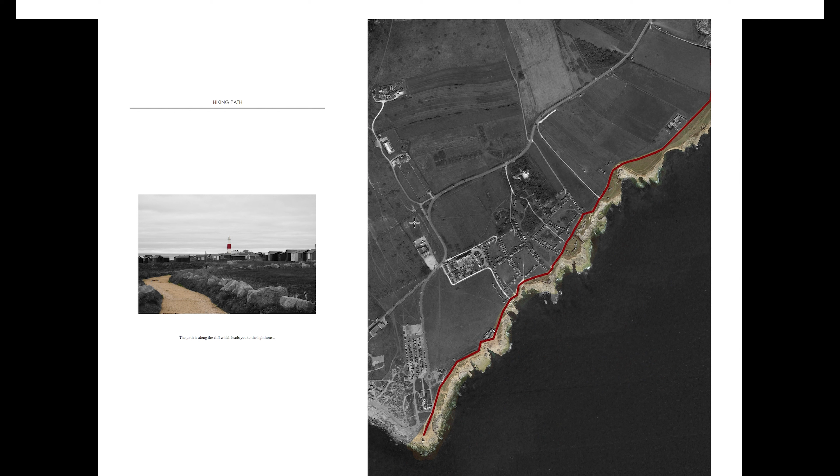My sites are located on the coastal hiking path around Portland Bill, which is the southernmost point of Portland. The path is along the cliff which leads you to the lighthouse. During my first site visit, I found out that the Bill is a nice tourist attraction spot, with a series of landmarks around it.

Through investigation of the geological incidents that happened along the coast of Portland Bill, I found out that Portland Bill is a great place for geological observations. Yet there are no other leisure facilities along the coastal path, and many people just drove to the Bill and missed the views along the cliff.

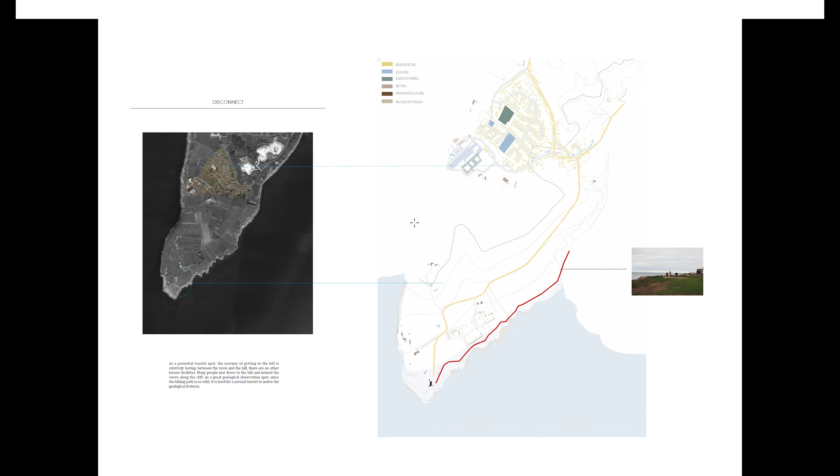Therefore, the project proposes a series of leisure facilities along the path to lead and attract people to walk through the path to the Bill.

The program from left to right will be a gallery, a restaurant, a toilet with an extraordinary experience, and a small hotel room. Each occupies a great spot for observing various geological features, including the cave and the collapsed coast.

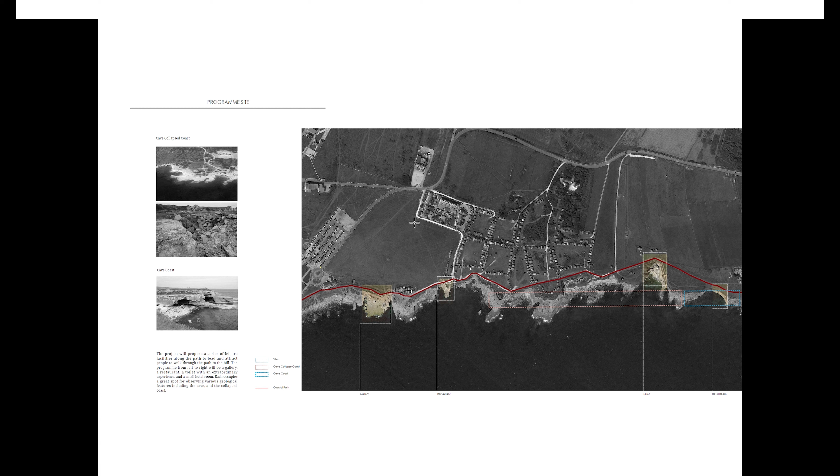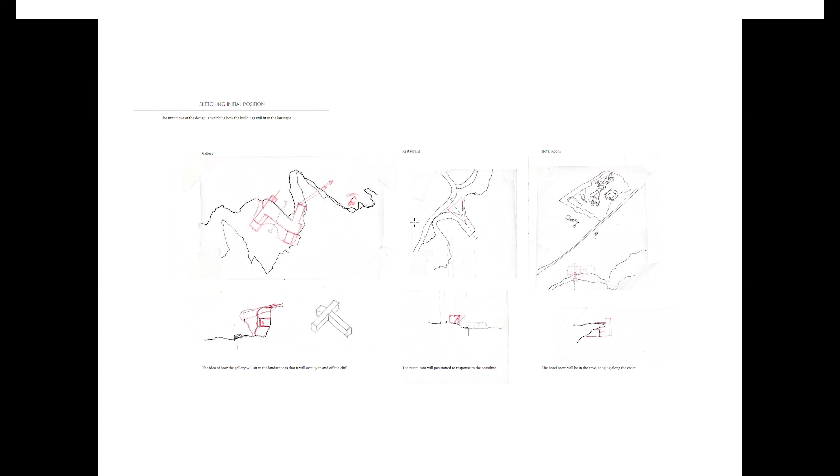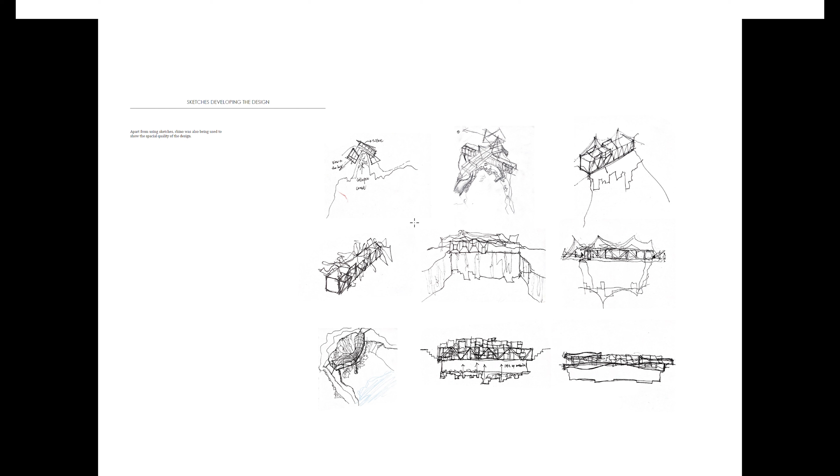I first chose the toilet to develop the design, since the program is much simpler to design. The tests include digital models in Rhino and traditional sketches. This is the first design and render of the toilet.

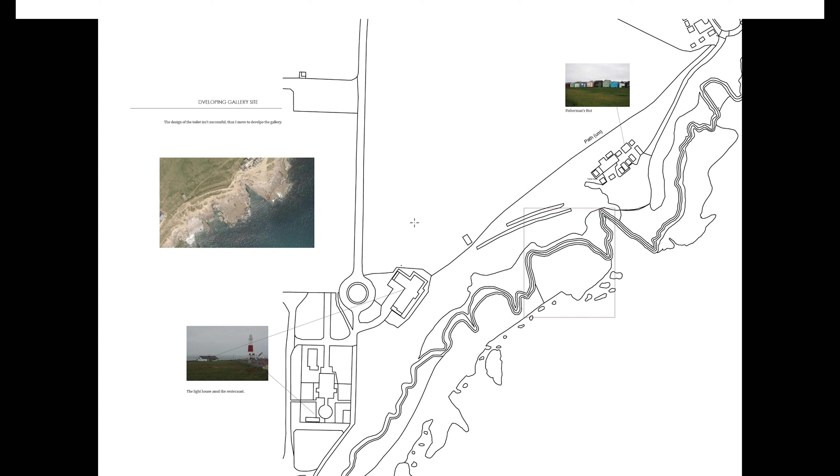The design concept is that the building will be a composite of fine-cut Portland stone and raw stones lifted from the coast. At this stage, I found out that the design I developed with the toilet wasn't successful, and designing it constrained my imagination. Thus, I moved to mainly design the gallery to develop further.

Before diving into the design and getting lost again, I reevaluated the design strategy of my Project 1, which is combining different scientific forms generated by Grasshopper, and I tried to bring this strategy back to my Project 2.

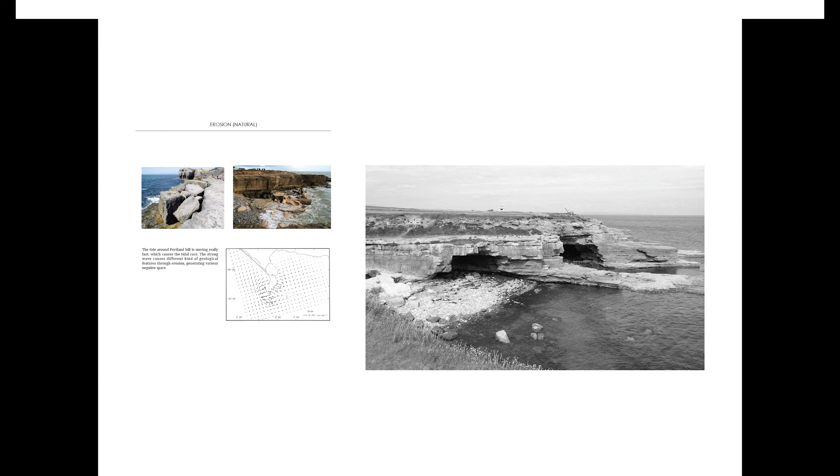There are two forces eroding and shaping the coast of Portland Bill. First is the wave - the strong wave causes different kinds of geological features through erosion, generating various negative spaces. Another force is quarrying. Therefore, I am thinking of how I can reverse the process of these two erosions to build out the space.

There are three major concepts that drive the design of the project. The first is using the architectural elements of the quarry, such as the lighting, the contoured landscape, and the path inside the quarry that takes you to explore the underground mystery.

The second design tool is the wave data of Portland. The data includes the cycle, the height, the location, and the direction of the waves. Lastly, I determined the percentage of artificial and natural erosion in each site, which would determine how much percentage of digital design I would use in each building.

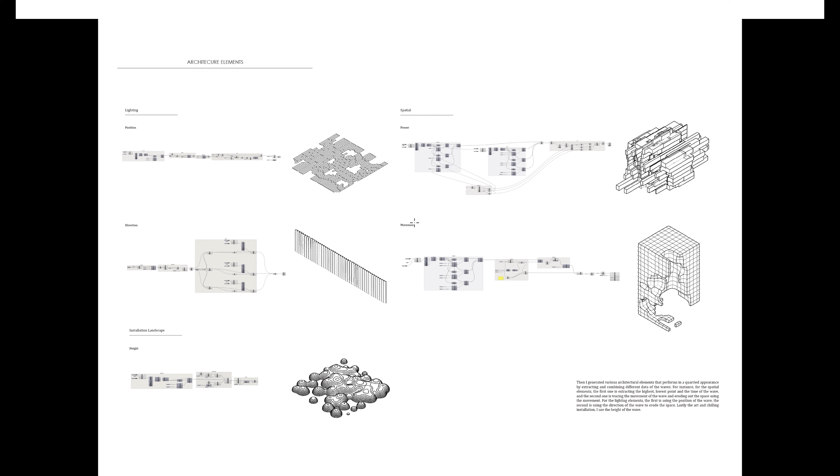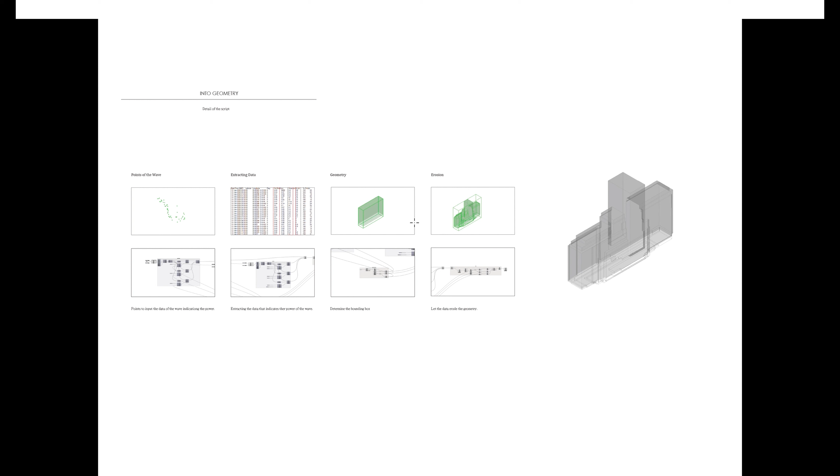Then I generated various architectural element sets, performing the quarried appearance by combining different data of the waves. For instance, for this spatial element, I first mapped out the position of the wave within a specific timeline, then extracted the data that indicates the power of the wave at the corresponding time. Finally, I improved the script so that the data could erode within the geometry that I determined.

So the form varies not only when I apply different data - the longer the time I apply it, the more the data will erode the space, and it also varies when I apply it to different geometry.

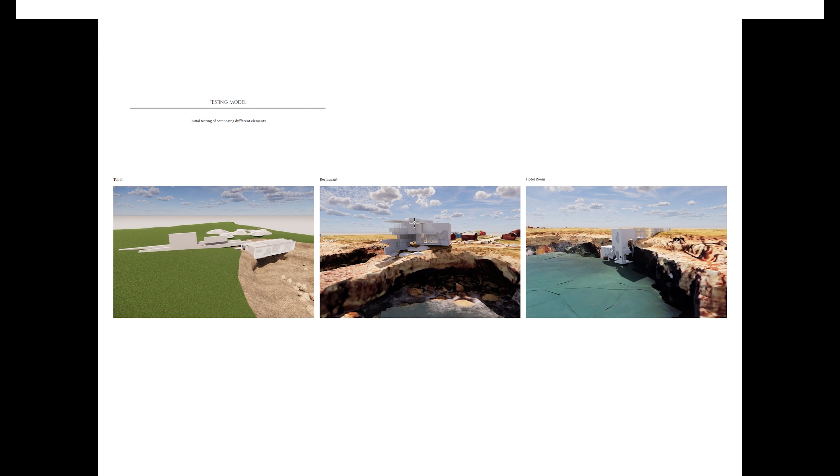With all the elements, I first designed conceptual models that combine the elements in Rhino, and for the plan of the building I worked in a more traditional way, sketching how the circulation of the gallery could experience like a quarry.

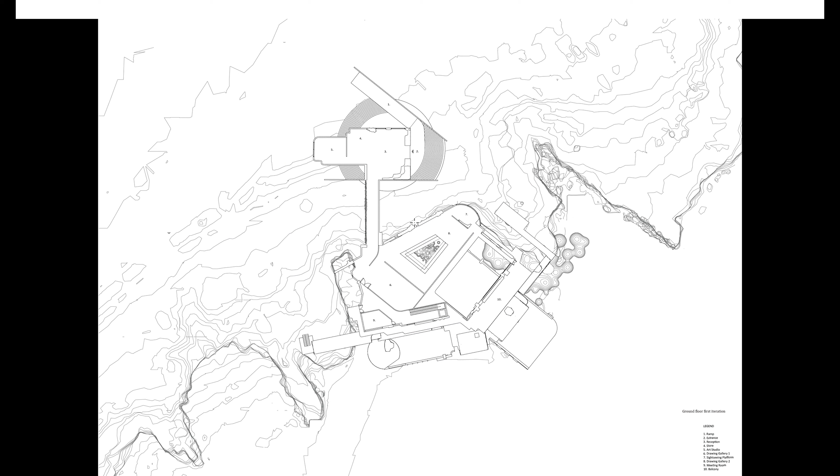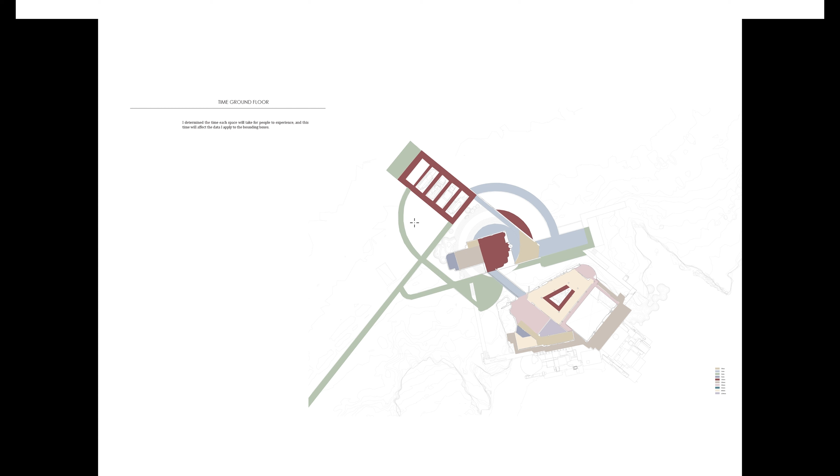With the plan done, the next process is to start applying data to erode the building. First, I determined the time each space will be spent by users. Then I built the model and created several bounding boxes waiting for the data to erode with different corresponding time periods according to the time I determined for the spaces.

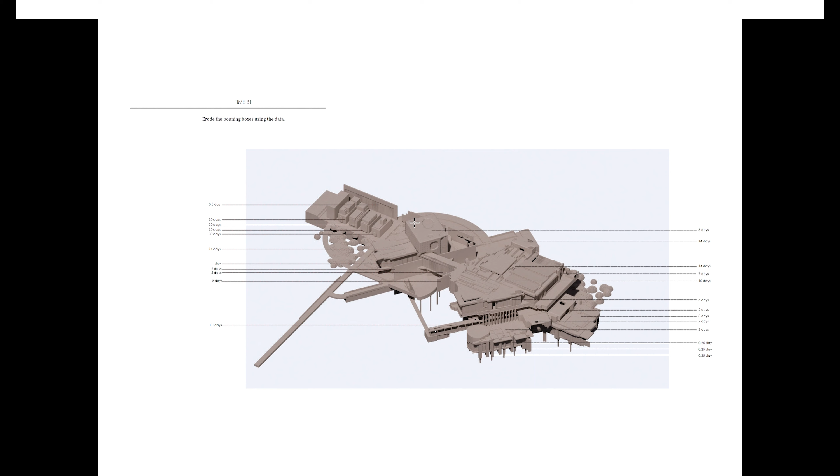50% of the bounding boxes were applied with the data to erode. The material of the data will mainly be Portland stone, and other time-affected materials such as wood and rusted metal will be used in less time-consuming spaces such as corridors. Other stone materials were selected to add variation to the spaces.

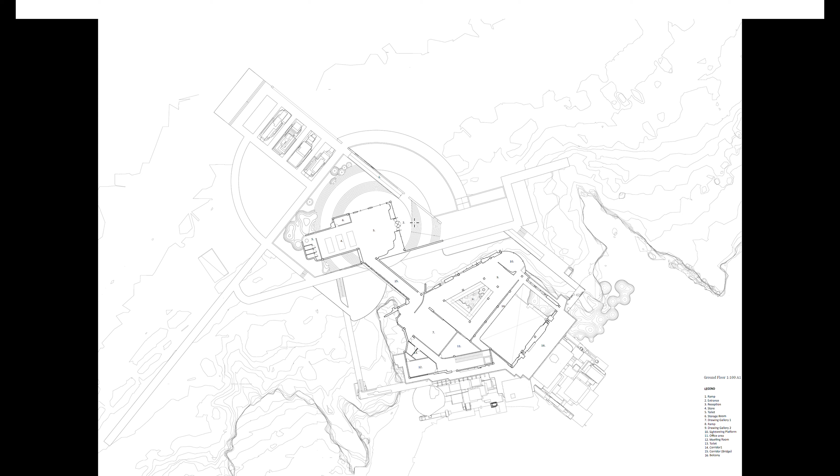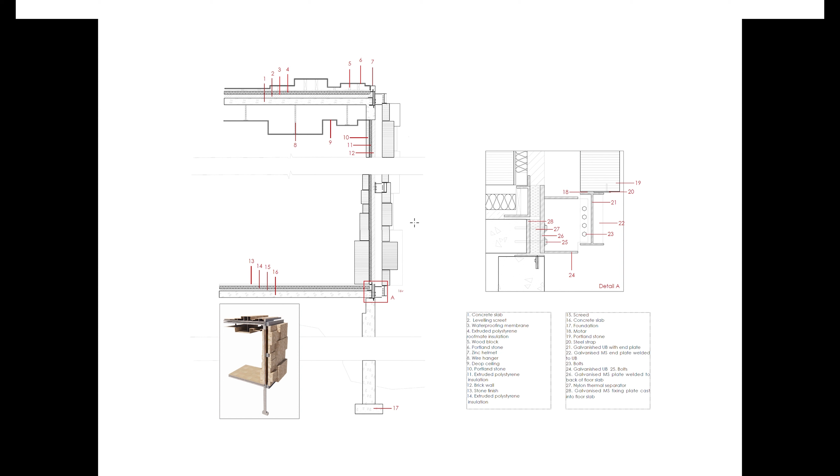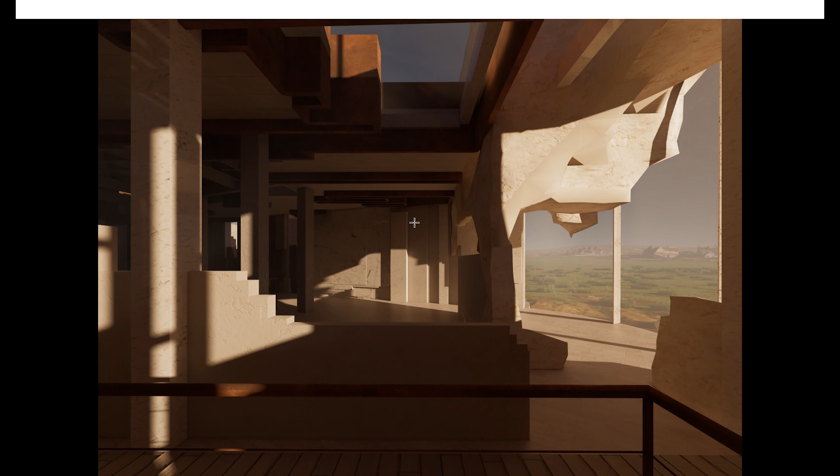And final renderings of the gallery. And now I will show you the final film of my project.

The eventual arrival of steam power and mechanization freed quarries of all constraints and enabled them to gorge inland, removing field after historic field, giving the landscape we see today.

Wight, Portland, Plymouth. Southwest 5 or 6, occasionally 7 until later. Rain, then showers, moderate or good.

The island of Portland provides one of the most dramatic coastlines in England. A block of limestone, tethered to the mainland only by the mighty Chesil Bank. Its historic isolation and unique character make this story all the more remarkable.